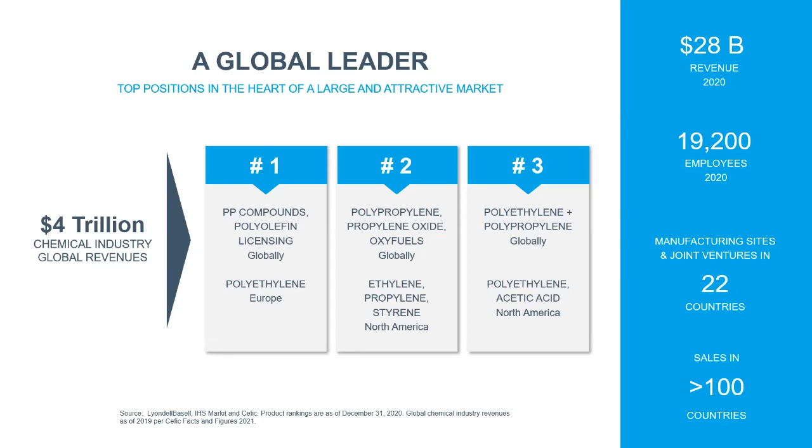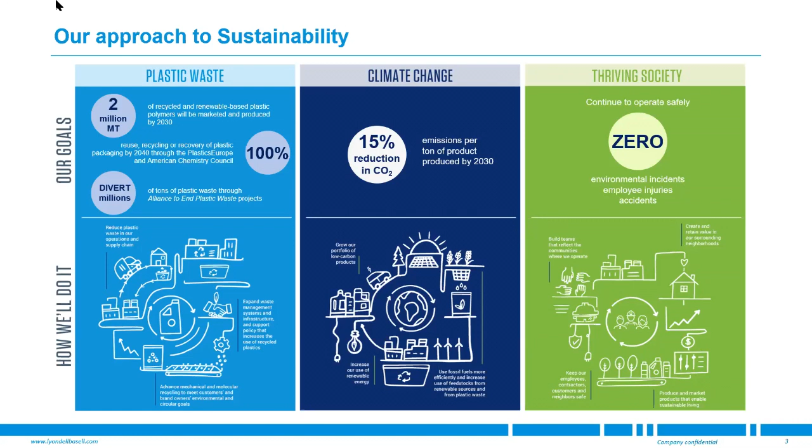And we also have a range of intermediate chemicals that we manufacture. We have refining capabilities in the US, and globally we manufacture polyethylene and polypropylene. In terms of our approach to sustainability as an organisation, I would welcome anyone to read our 2019 sustainability report. My understanding is probably in June, there'll be the 2020 version being released, but we've made commitments to globally produce 2 million tonnes of recycled and renewable-based plastic polymers. We have committed to 100% reuse, recycling, recovery of plastics in packaging by 2040. And we are a member of the Alliance to End Plastic Waste, so a founding member.

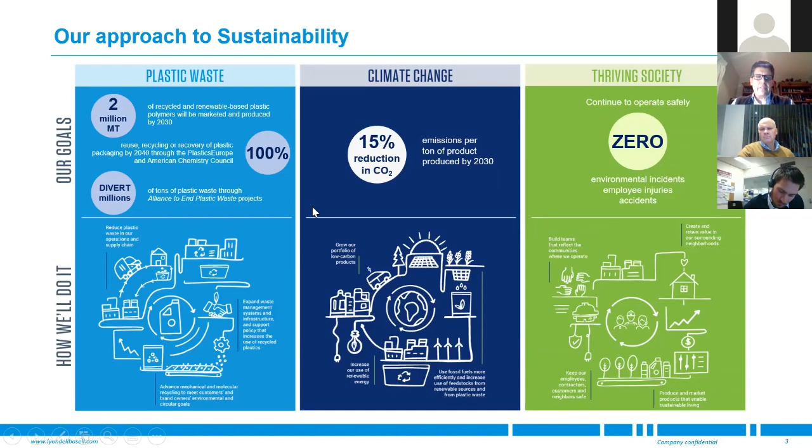We also have our CO2 emissions targets, 15% reduction by 2030. And we are very safety conscious, as most organisations are, but we have a program called Goal Zero, which is really aimed at safety and environmental incidences at a zero level. I just wanted to give a little bit of a feel for what we're doing globally, particularly in Europe at this stage. We've just recently announced a new brand trade name range. We typically produce grades that are either Hostalen or Moplen, or if they're stiff, they're called Adstif. If they're flexible, they're called AdFlex. So we're very imaginative in that area.

But what we've got now is a range of products called Circulen, and there are three fundamental Circulens. One is Circulen Recover, which relates to mechanically recycled plastic. Circulen Revive, which is about the advanced recycling of plastic waste, and that's something I want to cover in this presentation today. Both Circulen Recover and Circulen Revive concepts here in Australia. And a third one, which is Circulen Renew, which is to use renewable-based sources to produce polyethylene and polypropylene.

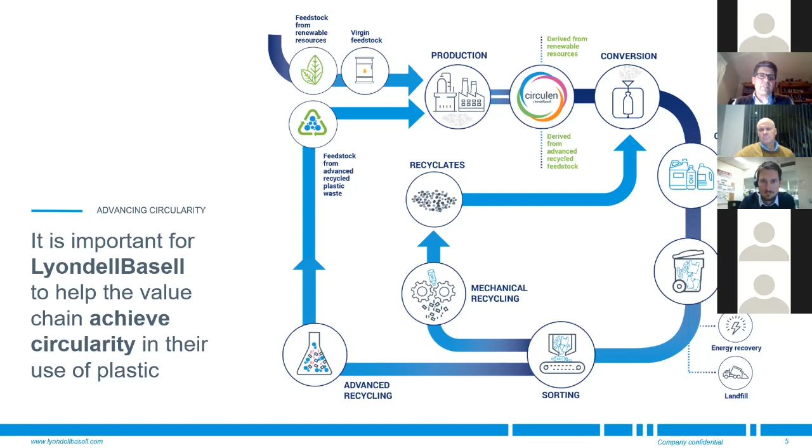I just wanted to say that we're avid supporters of APCO and the targets, and we also think that the new and expanding ARL, Australasian Recycling Label program, is going to really help with getting the right sort of feedstock into the right bin, into the right sort of areas. So we support the 2025 national packaging targets.

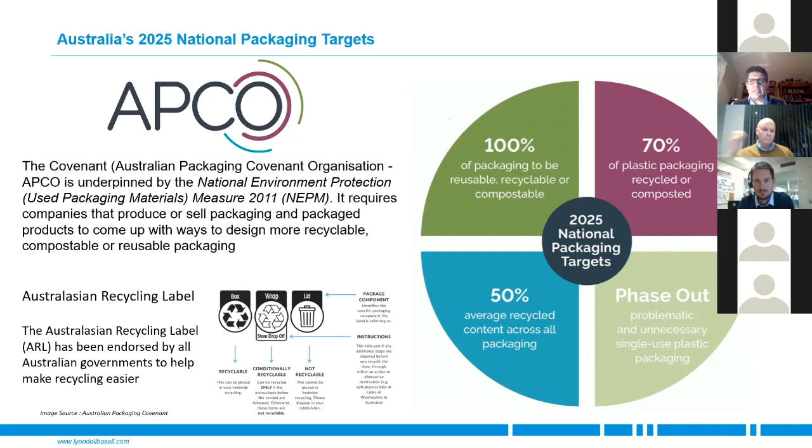We are an award winner. We won in 2020 the Sustainable Packaging Excellence Award. It was disappointing not to be able to get to the award; it was done remotely for us. We have really worked hard on our packaging solutions to our customers, and so we've won that award. We're pretty proud of it.

Just a brief overview of what we do within our product portfolio. Obviously, over decades, our customer base and in fact the plastics market here in Australia and globally has been looking to reduce, looking to down-gauge and use less material, and we've done that through two main fundamental areas of product development. We've made stiffer materials that still maintain their impact, and we've also produced lower viscosity materials that help those that injection mould produce parts at a faster rate, so you can get more out of your machine.

We supply into the durable applications area, so that's part of the reuse and repair section of the waste hierarchy, and we are progressively and increasingly playing more in the mechanical recycling and advanced recycling space. Advanced recycling is also known as chemical recycling or feedstock recycling.

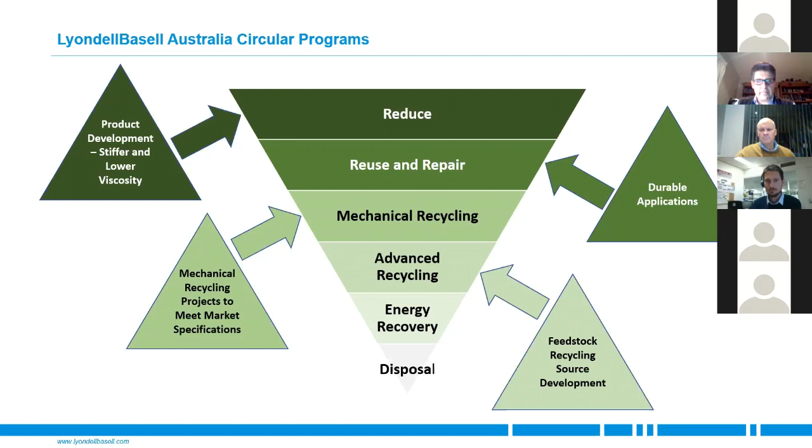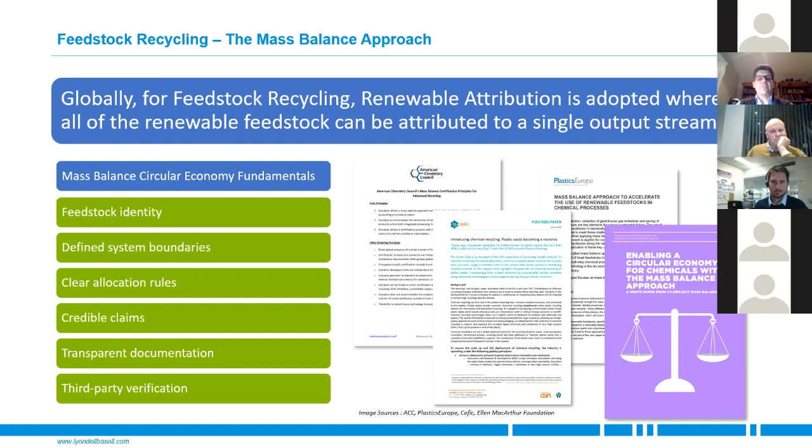I should just say that when we talk about chemical recycling, there's really only one kind of concept that is practical for the chemical industry, and that is this recycled or renewable attribution concept. This is based on the mass balance, where you are basically running a system which is using conventional sources of input. These are generally in our industry derived from fossilized sources, and they're non-renewable. But what you can do is add renewable resources into that stream, and you can just identify them through a mass balance process.

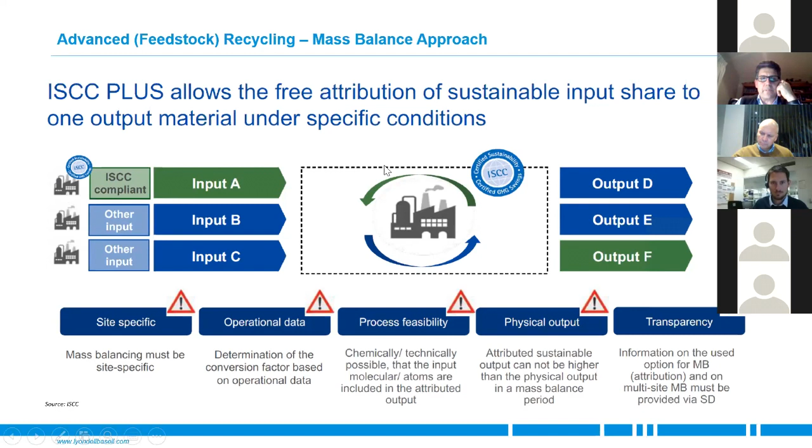The ISCC Plus, which is a certification system for renewables and chemicals, illustrates this really well. If you've got 3 inputs on the left-hand side, and you've got a renewable input, which is input A, you can take out 1, 2, or 3, or many products and attribute it to them, so long as you don't exceed the mass balance. I think that's a really good background when we are talking about the case study that I want to show you.

We're involved with a number of other companies in looking at a feasibility study in the Geelong-Altona petrochemical corridor. The other companies involved are Nestle, Coles, Licella, IQ Renew, and Amcor. I just want to briefly talk about the Licella technology. It's a plastic waste to oil conversion technology, so it is an advanced recycling technology. It uses near supercritical water. It is what is termed hydrothermal cracking, and the technology is termed CAT HTR by Licella.

Now, Licella are an Australian company, and we've been working with them for a couple of years, and we've just started this feasibility study earlier this year. We hope to complete it by around mid to end of June. Once we've completed that, we'll be looking at the opportunity and possibility of investing in this technology for the Australian petrochemical market. They do have a pilot line, and we'll come to what we've done with that pilot line as a demonstration. But a full-scale single line will take about 20,000 tonnes of plastic waste, and convert it to about 16,000 tonnes of synthetic oil derived from plastic per annum.

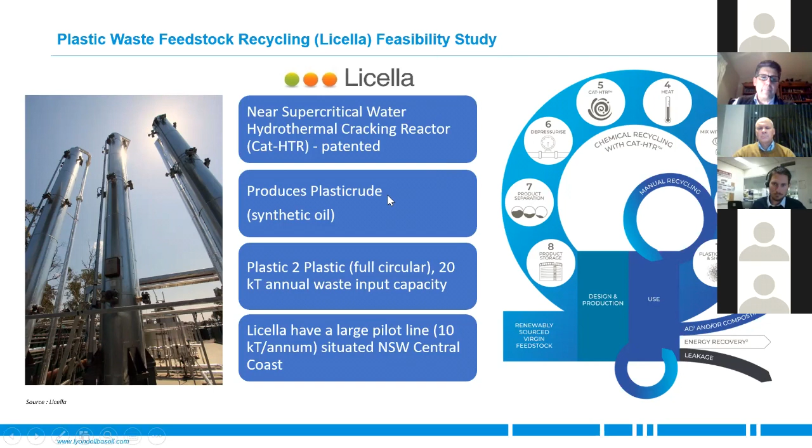These are the partners within the supply chain of this feasibility study. We've covered quite a broad area of that supply chain. Involved also is IQ Renew, which is a partner of Licella. As I mentioned, Coles, Nestle, and Amcor. All of these partners have industry funded this feasibility study. As I mentioned, it's looking in the Geelong-Altona petrochemical industrial corridor.

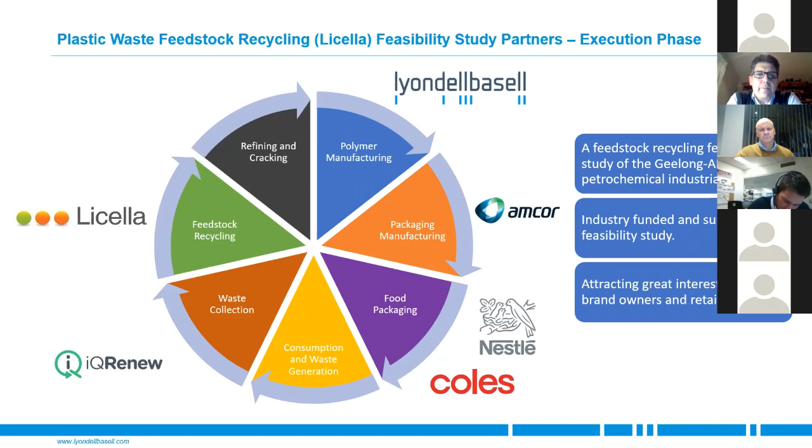LyondellBasell's objective here is to secure feedstock for advanced recycling at its Geelong site, which produces polypropylene. I just wanted to run through, you may have heard of this in the press. We've got a bit of press coverage on what we've internally called Project Kitkat.

And the name kind of gives away what was actually done. And so this was, I should say, a demonstration. None of the organisations are yet certified to either ISCC Plus or any other type of program. So the materials weren't put out there for sale, but it was really to demonstrate the process. And we actually went through what I'm about to show you, but it involved these 9 organisations all collaborating to eventually produce a Kitkat wrapper that had mass balance attributed 30% recycled content.

Now, as we would imagine and can kind of guess, these types of flexible packaging are not really that easy to either mechanically recycle or any other type of recycling program. So chemical recycling or advanced recycling really lends itself to this.

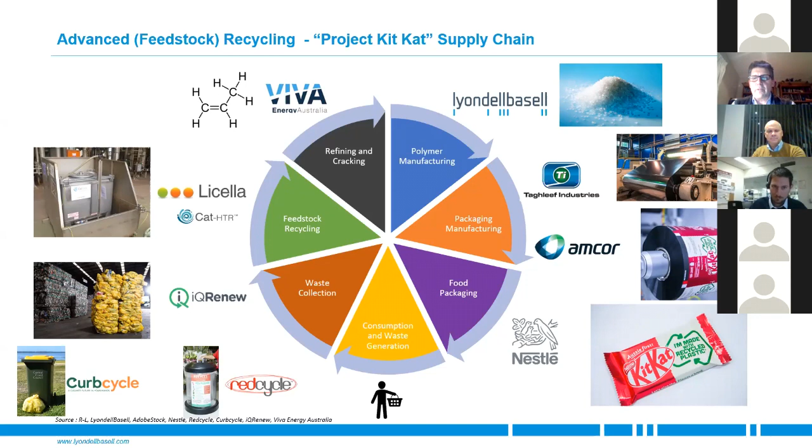So where did we start? Well, there were two collection programs. We're quite familiar, I think, with the Red Cycle program that's at Coles and Woolworths supermarkets, where we can take our soft scrunchable plastics, flexible plastics to the bins on a periodic basis, which is basically every time you probably go to the supermarket.

And there was a trial that was being run and supported by Nestle and IQ Renew, which was the Curbcycle program, whereby residents were asked and volunteered, and there's been a really good response, to put soft plastics into a dedicated sealable plastic bag, and this would be put into your typical recycling bin or the yellow bin, and then it would be collected at the waste manager. In this case, it's IQ Renew.

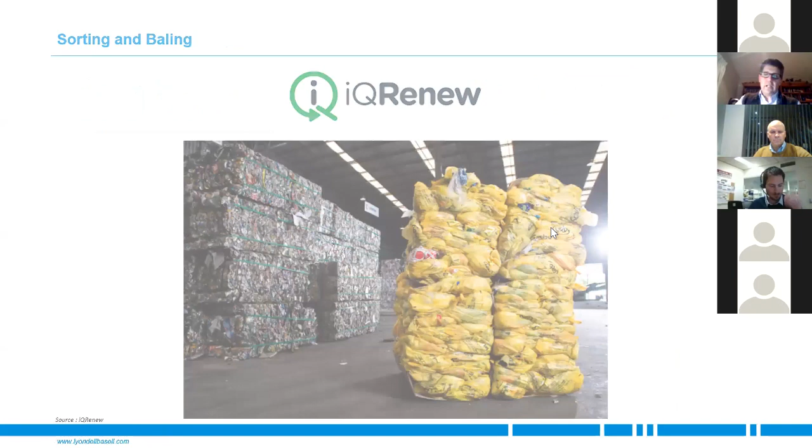So they would sort out all these soft plastics, and you can see in the background other types of plastics, more rigid plastics that are baled. But this is a collection of the trial material. So we took that material and sent it to Licella, who then in turn shredded the material and then processed it through their reactor systems. And you can see those reactors on the left. There's three large columns, and from the high temperature, high pressure water environment, we're able to produce oil.

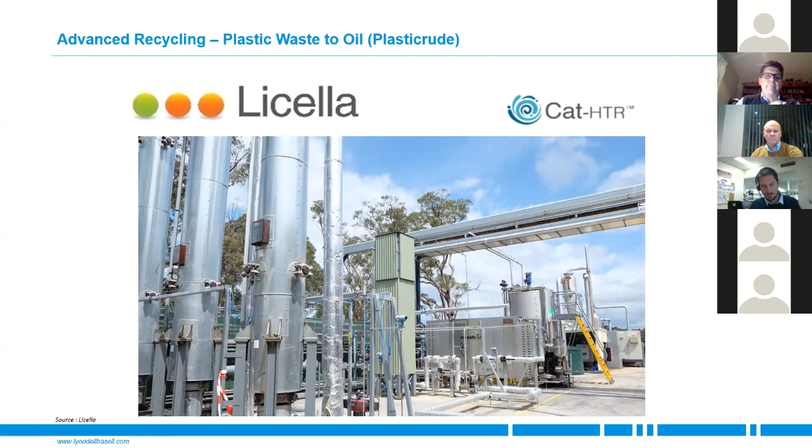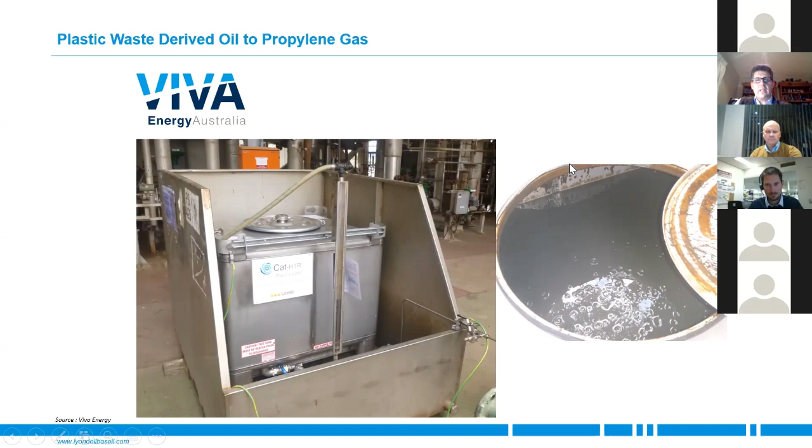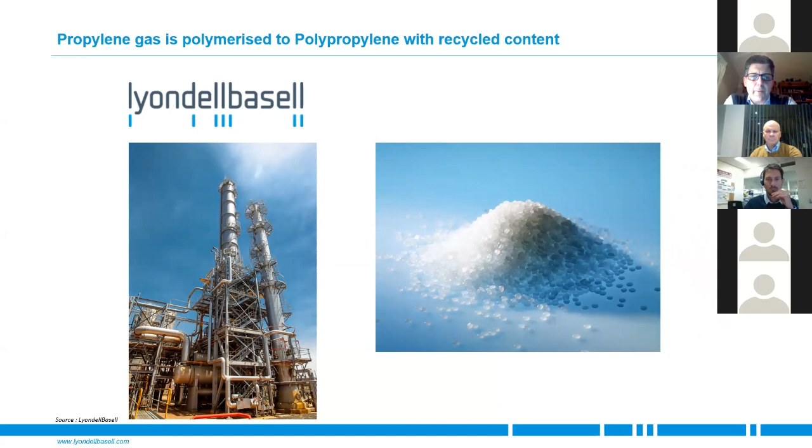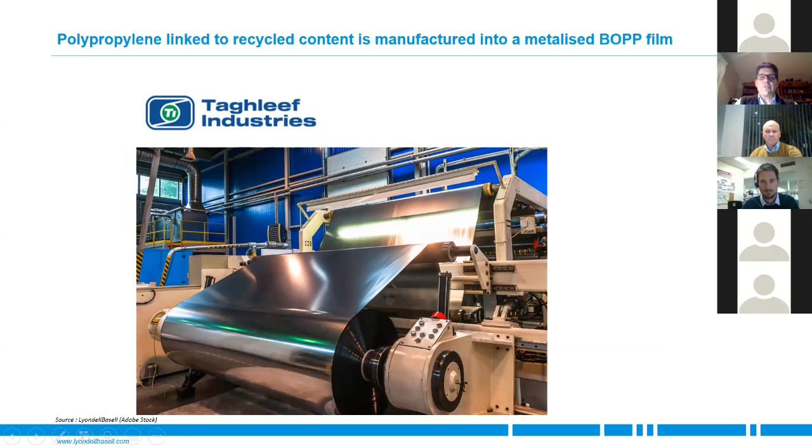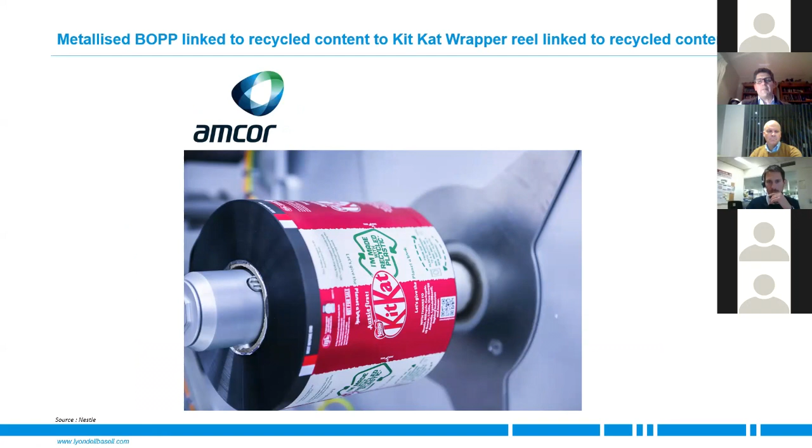That polypropylene was then taken to Taghleef Industries. Once again, this is all through a mass balance process. Taghleef Industries produced metallizable film, which would be spec'd for an eventual Kitkat wrapper. That film was then further processed by Amcor, which went through the process of putting on the printing, the cold seal, and other type features within the reel. And then that was taken to Nestle, and they went through the process of packaging the Kitkats.

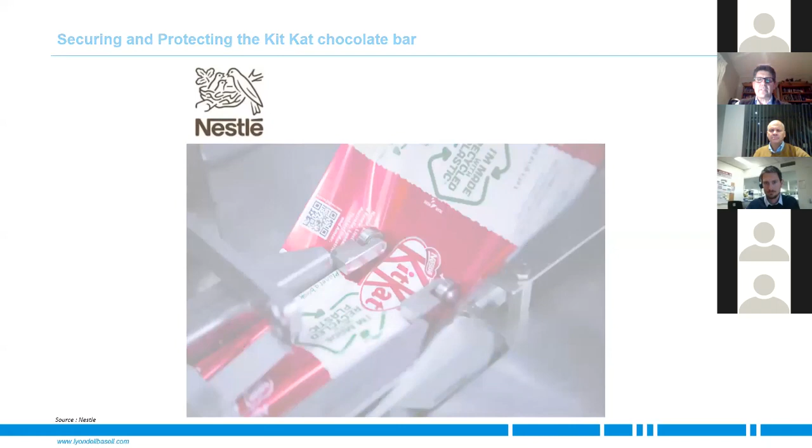And so on the label, you'll see here, it didn't hit the general market. We really have just used it for publicity in the industry, and obviously highlighting to federal and state governments what we've done here. We've got a very good response. I will say that I heard a story that Nestle had received some interesting Facebook responses, and there were some people that were very concerned that the chocolate was made from recycled plastic. So I can assure everyone that it's the wrapper.

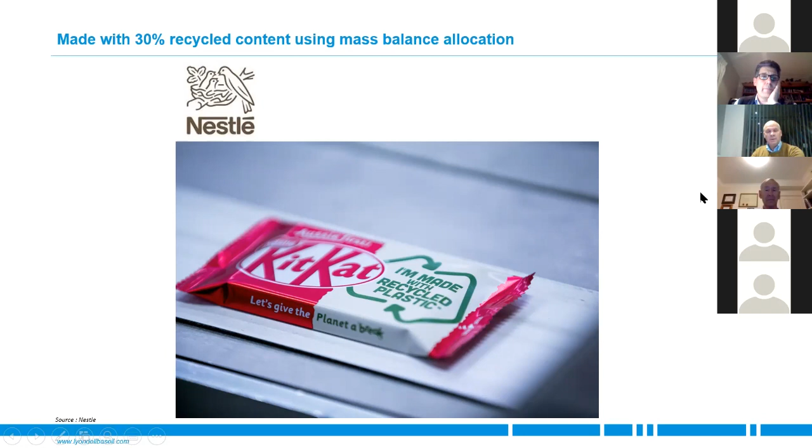This really does highlight, and I think we've learned a lesson, that the labelling of what you've done is really important, and the ISCC Plus has very specific labelling. And so the labelling that would, upon certification, go onto such a product would indicate that the material was made from recycled content that was sourced from a mass balance process. That's pretty critical because it's not a segregated process. We haven't stopped the refinery and then put the right feedstock in and then started it up again and run it as a segregated process. This is utilising existing technology, and I think they do this because at some point in time, maybe all the feedstock would be from recycled content. That would be the ultimate.

So this is another picture. We had a launch, which was called the Wrap on Soft Plastic, put on by Nestle, which invited many competitors and industry players to participate in the launch of this event. So it's quite good.

I want to move on a little bit. I've spoken about advanced recycling or chemical recycling, but wanted to just talk about what we might be doing or are doing in the mechanical recycling area. So we do have a project that we're working on at the moment. It's called Waste Saving Water. Basically what we're looking at is these polypropylene takeaway containers. This is a big part of our market, and we're looking at how we can create a recycling stream for these types of products.

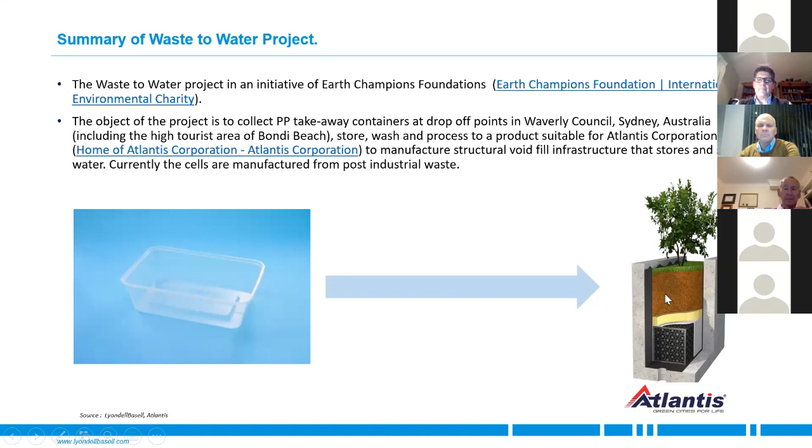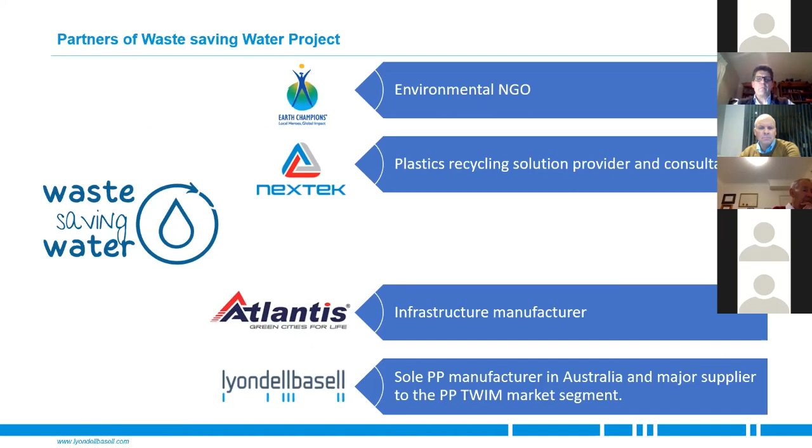The project is supported by Earth Champions, which is an international environmental charity. It involves obtaining these takeaway containers and converting them to water-saving infrastructure within urban environments. So these are the companies that are involved. We've got Nextek, Atlantis, which is the manufacturer of the infrastructure, and we're involved as well. So we're supporting this project, and ultimately we've got kind of grand plans.

First of all, we want to see this linear recycling stream occur, in which we would set up a collection, a cleaning and a recycling, and then a second life manufacturing program. But also we need to take off a feed and start to experiment with cleaning it up even further to a food contact state, and then potentially putting it in at our plant in Geelong at potentially a 30 to 40% level.

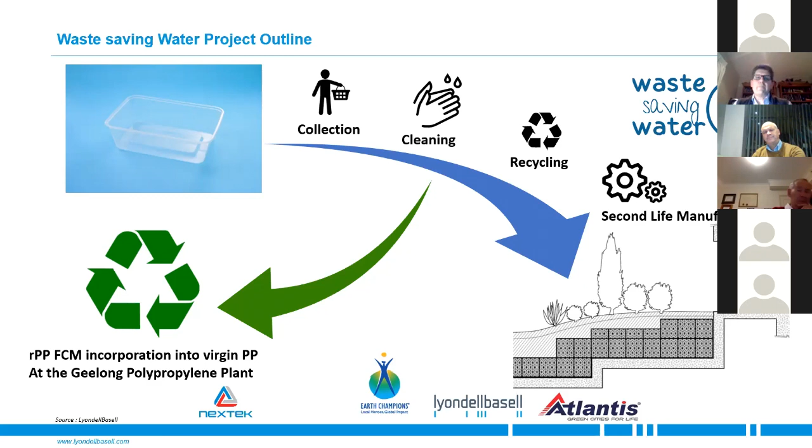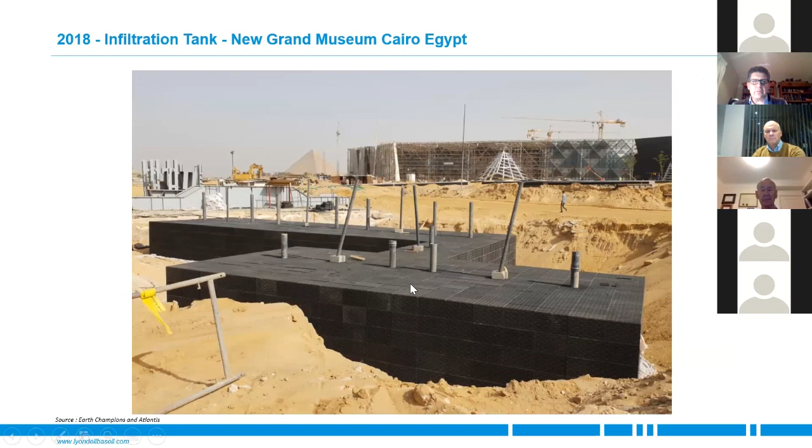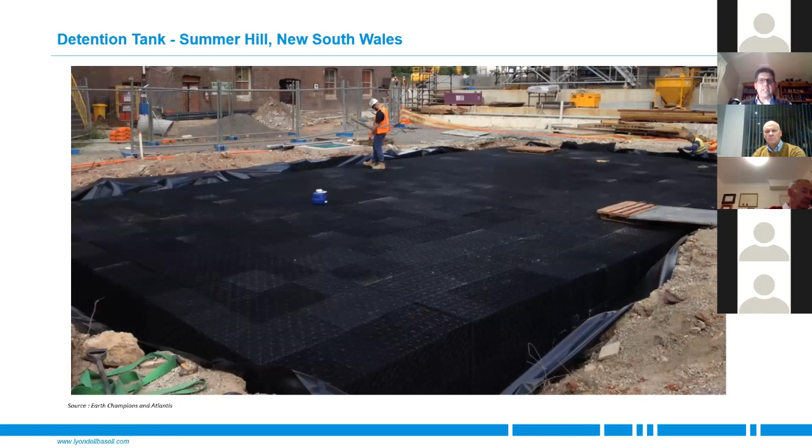These are some of the infrastructures that exist. You've noticed this has got one of the pyramids of Egypt in the background, so it's clearly in Egypt. But this is what that water-saving infrastructure looks like as it's being built. Here's something in New South Wales, another type of system that's occurring here. So what we are planning on doing is setting up a demonstration of the collection and then creating a particular infrastructure project. So I think that's coming along there.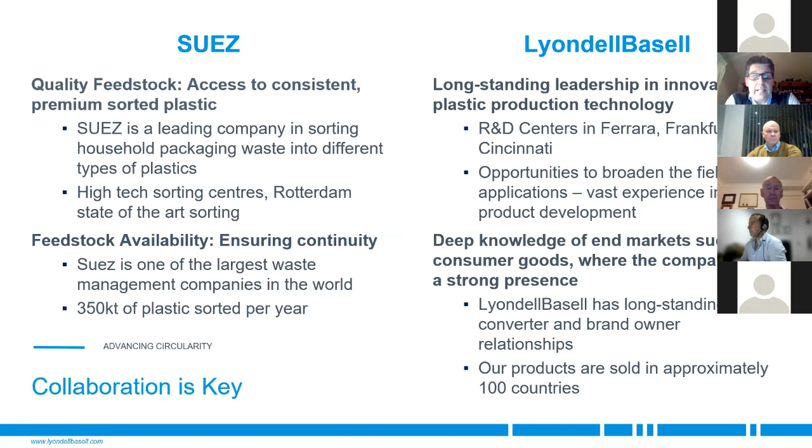I should say that we are really looking at a number of programs in Australia where we're exploring collaboration with waste managers. I can't really say anything at this stage as to what areas we're working in, because we're still in that development stage. But I can point to what we have done in Europe. We have a joint venture with Suez, which is Quality Circular Polymers, and we have two organisations dealing in two areas. One is the waste area and one is the polymer manufacturing area, and we've collaborated, and we think collaboration clearly is key to success.

It's a 50-50 joint venture, and I just wanted to show you a typical grade range. You can see that the materials are grey or ivory. They're all based on ethylene and polypropylene post-consumer waste.

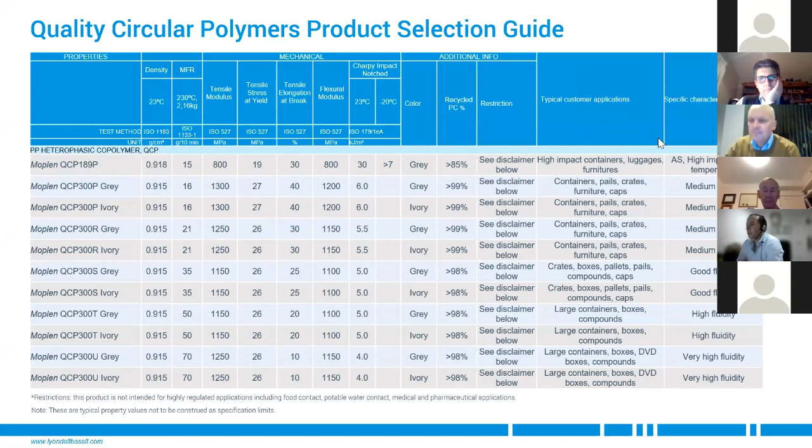Lots of exciting new developments happening, and it's certainly good to hear that you're looking at the Licella technology very closely, and also that you're considering recycled polypropylene for food contact applications. That's certainly a bit of a pain point where I'm based at PACT. A lot of customers are asking us what's happening with recycled polypropylene. Can we get a food grade resin? So before we move on, can you comment on that aspect, how's that going to be done with LyondellBasell? Is that going to be a mechanical recycling process, or are you going to do advanced recycling for RPP?

I think we firmly believe that both advanced and mechanical need to be looked at hand in hand. They're complementary. If you consider the waste hierarchy, as you move down, you should avoid, you should reuse. But then in terms of recycle, mechanical recycling fits above advanced recycling. So if you can mechanically recycle something, you should. And for those materials you can't mechanically recycle, then you should go towards an advanced recycling route.

If you were looking at a MRF or a PRF, these could be perhaps the REDcycle content of their collection. It could be tailings and offcuts and waste, really small materials, the broken caps and all that sort of stuff that could go into a chemical recycling process. And if we can get really good source separation and cleaning, then ultimately a mechanical recycling route. I think food contact is going to be a big challenge for mechanical recycling.

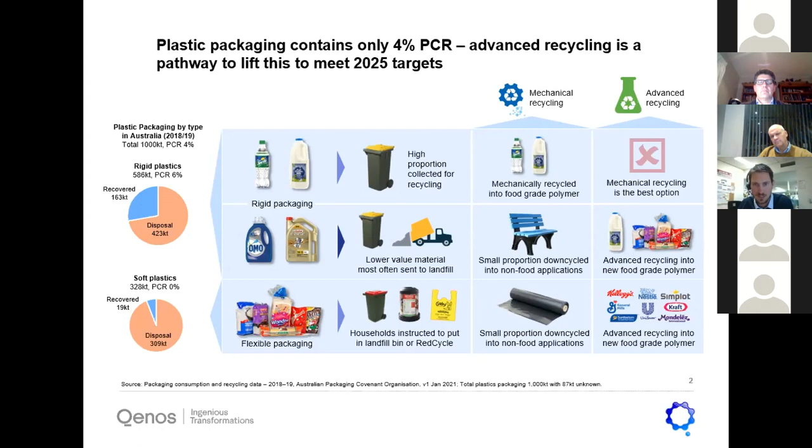Okay, so advanced recycling. So we believe this complements mechanical recycling, basically by upgrading heavily contaminated waste plastics to virgin-like quality. So let's first step back and look at the traditional way we make polymers, specifically polyethylene and polypropylene. So we start typically with a fossil feedstock. Now this might be a naphtha derived from crude oil, or it could be ethane gas directly, which goes into a steam cracker, for example, where you're making the monomer, which is ethylene in the case of Qenos's operation, and we polymerize that to polyethylene.

This then gets converted at packaging converters or other plastic converters into products that are being used, and in the old traditional linear economy end up mostly in landfill. Luckily, we do have, of course, recycling already implemented and working: mechanical recycling. So I'll not dwell on that. This is quite well established, but as we know, it's not capable of dealing with all the different waste streams. And so in the schematic there is a rest fraction from the mechanical recycling that can be further treated, and this is basically where we see advanced recycling coming in.

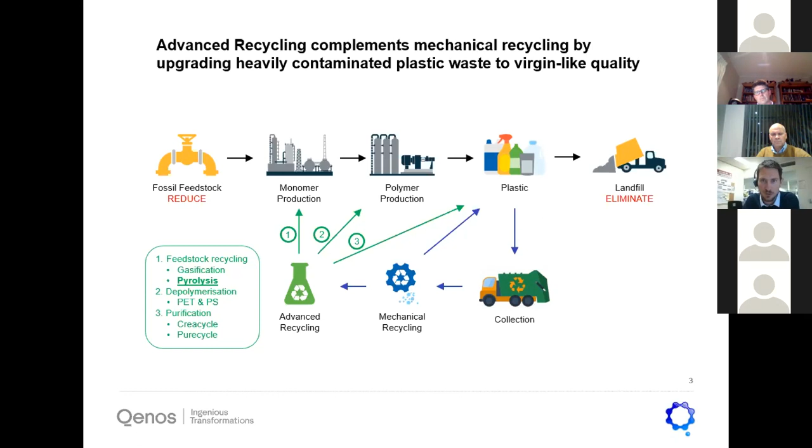So I think the widest applicability in our context is probably feedstock recycling in the form of pyrolysis. So let's look at that in a little bit more detail. Pyrolysis is able to treat mixed plastic waste to generate liquid and gaseous feedstock for polymers. So what kind of mixed plastic waste can it actually treat? It is ideally suited to polyolefins, which means a mixture of HDPE, LDPE, and polypropylene. It can deal with some other polymers like PET and polystyrene, but they need to be in low percentages.

They will basically not generate the desired feedstock for making new polymers again. The key one that one has to take out is PVC. PVC in this process would be generating hydrochloric acid, which could corrode the installations and also create all kinds of molecules that are not really suitable for further treatment, and should be really removed. You could argue it should maybe not have a place in packaging at all, but I'll leave that to the packaging designers.

So this mixed plastic waste feedstock is then fed to a pyrolysis unit. Now there are many different types of reactors being used. One example that Rob shared was about the Licella process, but there's dozens of different technology providers that have their own pyrolysis technique using catalysts or without using catalysts. Principally, it's operating at a high temperature between 400 and 650 degrees, importantly in the absence of oxygen.

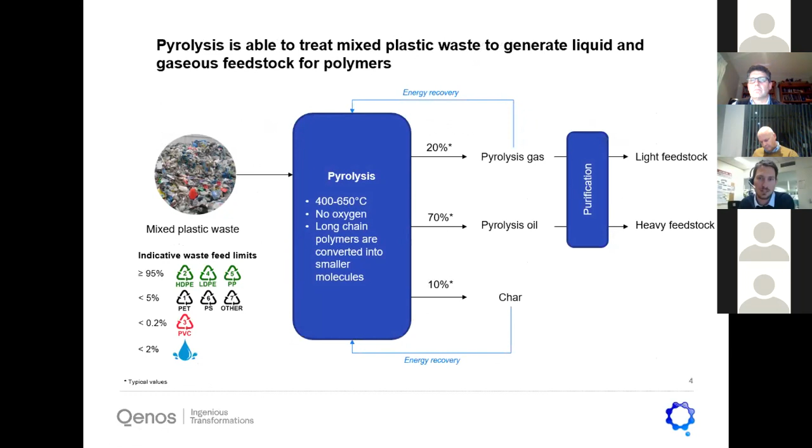So, sorry. This process has been known for 30, 40 years, and there has been a lot of academic research into pyrolysis, but it has been very difficult to commercialize. And it hasn't really been until the last 2-3 years that there's a real success rate in commercializing this for recycling. And I think the commitments that brand owners and governments have made have been a real catalyst in the commercialization of that.

And so on this page, I just want to show you a bit of the global rollout of pyrolysis-based feedstock recycling. And this is really accelerating. I think this list would have been very short had I talked to you 2 years ago. But we see at the moment, almost every week, a new producer announcing new capacity. We're seeing this capacity especially being built in North America, with a couple of projects announced, some coming on stream this year, others in 2 years. And the other region with a lot of activity is Europe, with basically all of the major producers announcing capacity for advanced recycling through pyrolysis type techniques.

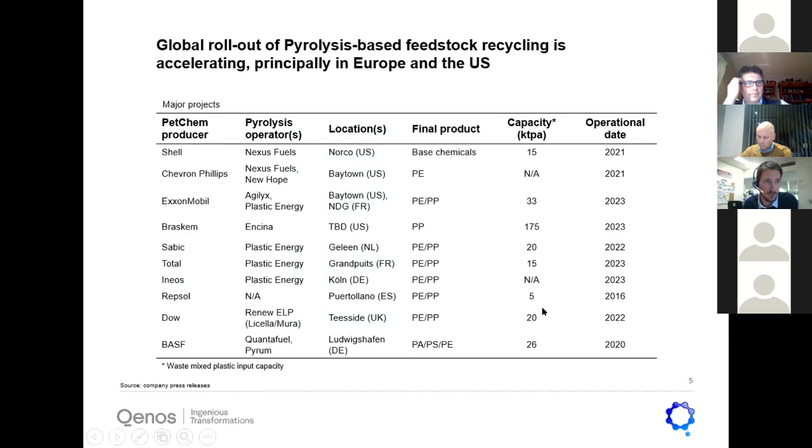I will not dwell on this further, but just to show you that yes, this is going from the lab into commercialization and to commercial scale, even though there's still a long way to go looking at those capacities and comparing that with the annual demands for commodity plastics.

So pyrolysis-based feedstock is optimally recycled back into virgin-like resin using existing refinery and petrochemical assets. As we discussed, virgin resin is converted into packaging and other products, is used, and comes back through waste management into MRF facilities. What can be mechanically recycled should be mechanically recycled, absolutely. But a part of it is ideal feedstock for a pyrolysis plant, which can generate a lighter feedstock that could be taken up by ethane LPG steam crackers, as Qenos operates in Altona and in Botany.

And the heavy feedstock could be a very good feedstock for the resid crackers or FCC units of a refinery, which then generate both LPGs and propylene directly that can be used by polyethylene or polypropylene plants. And the LPG can also be cracked in a steam cracker, generating ethylene and propylene. And this way you can then close the circle.

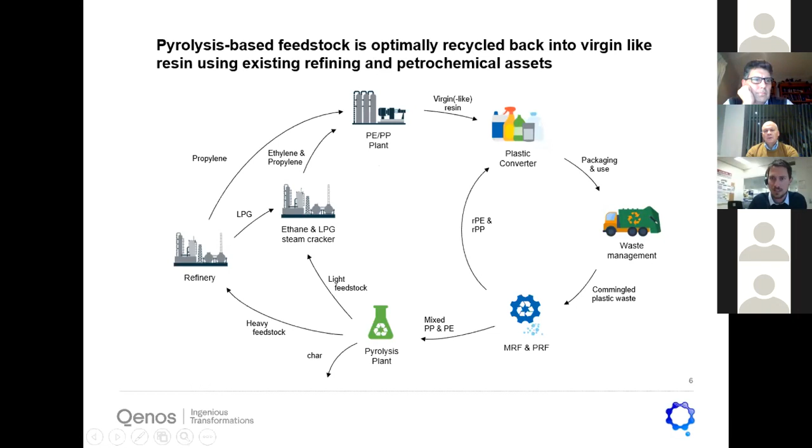And importantly, what you're making at this stage, that has come through the cycle, is absolutely indistinguishable from the original virgin resin. All the properties are completely preserved in terms of food contact and mechanical properties. There's absolutely no difference. So the challenge then becomes, how do we tell them apart? And I think Rob already touched on that. Mass balance is the key here to enable the allocation of recycled content by co-processing recycled feedstock in existing petrochemical plants.

It basically would not be economical to build new plants and everything just to process recycled materials. I think taking advantage of the infrastructure that is already there really enables this to be an economic process. And so you're using basically a mixed input material, fossil and recycled input, that is being used in a complex of refinery and petrochemical units, where it is then converted into products.

Now, in the process, all the molecules are perfectly scrambled and intermingled, and you won't be able to tell which molecule is in which product. But through mass balance accounting, you know what's going in, you know what's coming out. You can't get more recycled content out than you put in. Plus, you have to account for any losses along the way, so-called conversion factors. You can actually make that work.

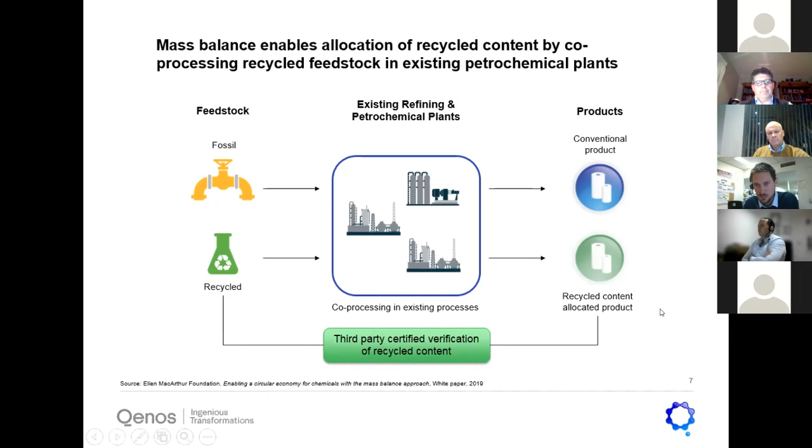And in order to make that transparent and build trust in that, third-party certification is really important here to make sure that the right thing is being done, and to create trust from brand owners and consumers. Now, are we helping the planet with that? There's of course a lot of challenge to that, and data. There's not a lot of data out yet, but there are some preliminary life cycle assessments that have been published. I'm taking here the example from Plastic Energy and Quantis, which uses the European context.

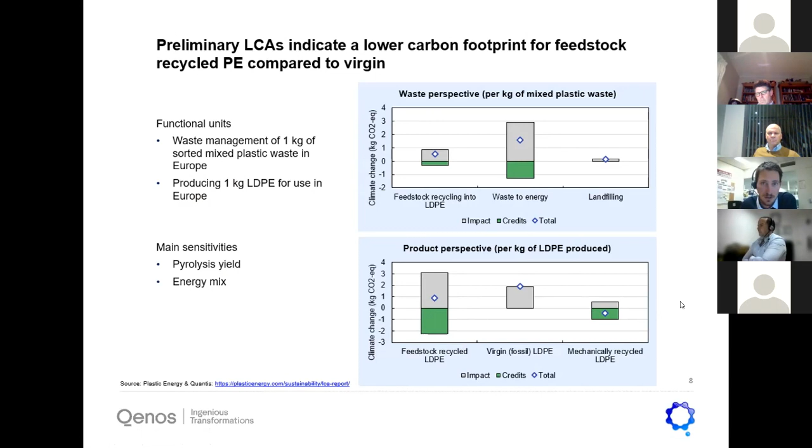So that brings me to the end and the perspective of where this can go. We think advanced recycling of plastics in Australia requires new infrastructure to be developed, but also, very importantly, existing assets to remain viable. There's a lot of work, and we're only playing a small part in this. Design for recycling will be essential. We need soft plastic collection, soft plastic sorting. Mechanical recycling capacity needs to be greatly increased. There's capacity needed for advanced recycling as well, and then also how to integrate that with existing assets. It's not as straightforward as it may seem.

And lastly, we have to make sure that the plants that we have in terms of refineries and polymer units, that we keep those assets operating here. And there was some positive news yesterday from the government for support for the refineries in Australia.

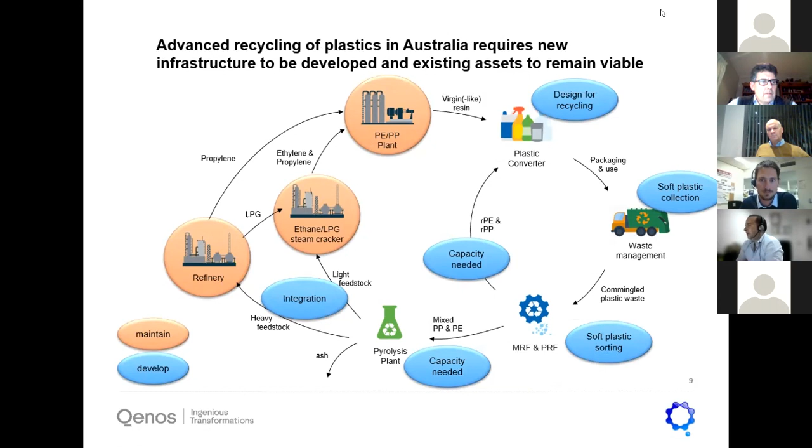Thanks very much. And that was excellent news yesterday, announced by the government that they're going to support the refineries in Australia. It provides surety and continuity, and that's what we need right now in the industry.

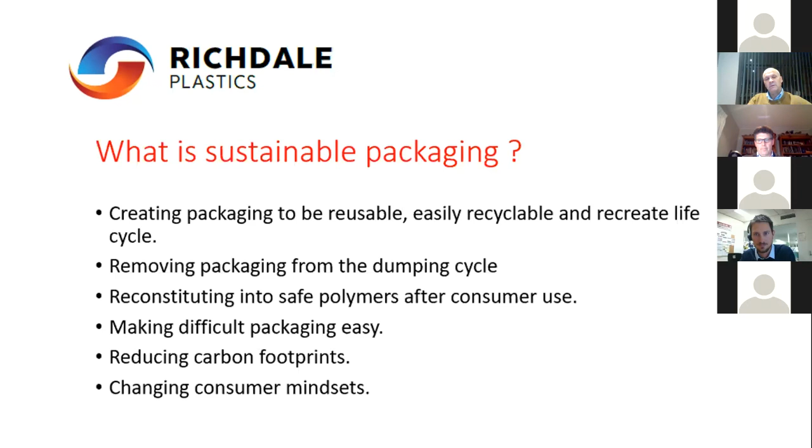It's not easy. Processing equipment has to change. There's got to be a rethink on how we do that, and how some of these flow wrappers, vertical form, fill and seal, and pouch filling machines work; they all have to be modified. So it's really important to understand that as well.

And so I think looking at other parts of the world and how they've actually created and designed their systems is a good place to start. And I think Australia is sort of going down that path. But there needs to be a lot of effort go into it, and this is going to be really important. So world's best practice recycling systems are going to be needed.

And it's like everything evolves, just like the automotive car has evolved over the years. The world's best practice recycling systems will evolve, and in 10 years' time, they'll look even more different than what they are today. So it's just a matter of putting the time and effort and the money into it.

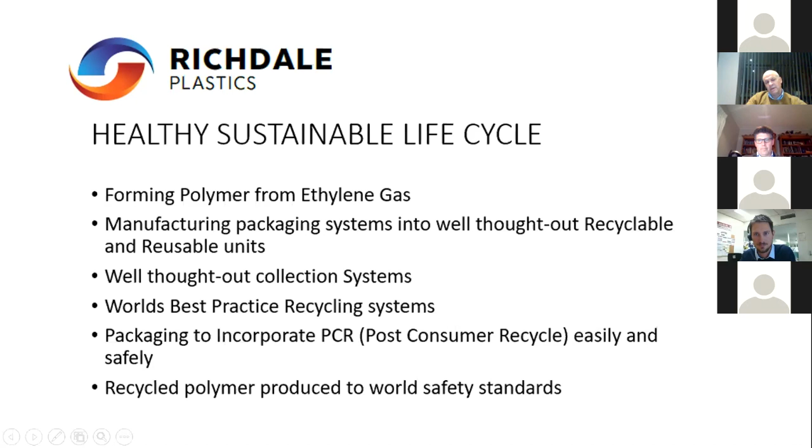Now, some of the packaging examples, if you look at packaging out there, this is just some of them, not all of them, but you've got the polyethylene systems, the polypropylene systems, PET systems, then you've got the new high barrier hybrids, which we're putting a lot of effort into, and you've got your PET PE laminate replacements, the coated BOPP, which is your PVC coatings.

So I think it was mentioned that there's a question mark around whether PVC should be in packaging. I sort of agree with that in a lot of ways, because it's a dangerous unit. When you have to recycle it, it produces some nasties, which most of us know, and so does PVC coated film. So classics are your coated BOPPs, your coated PETs, and your coated nylons. So they're the three prime ones, which in flexible packaging are still used heavily today.

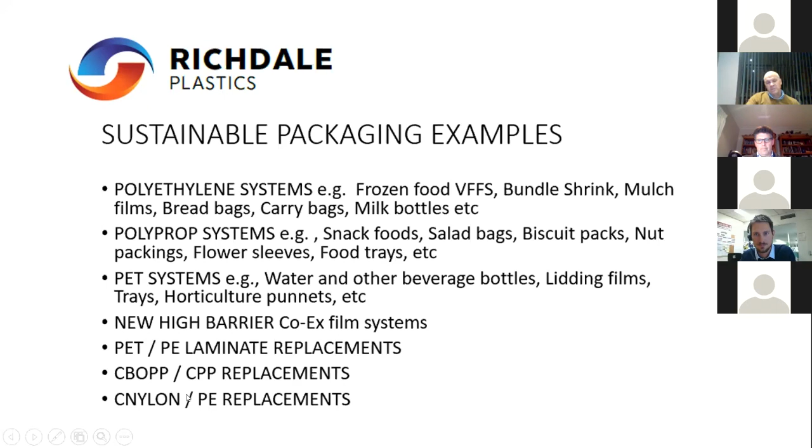So we've been very successful here at Richdale Plastics in actually replacing all of those three. We can actually replace every one of those structures with a fully recyclable product, whether you want it barrier or just non-barrier, and it's very cost effective, and in some cases it's actually even quite a lot cheaper. So it can be done, and these are some of the examples.

This one here, this is Sugar Australia. This is quite an interesting structure. It's a high barrier structure. It's a 7-layer; it can be run as a 9 as well. And that structure actually won the Innovation Award at the last FPLMA awards night. We took the coated BOPP or coated PET PE structure, and we turned it into a surface printed 7-layer coex, and this structure is recyclable.

So you can mechanically recycle this quite easily, and use it not in food grade, but you'll certainly get what we call a jazz coloured product out of it, with minimal contaminant. So it can be quite easily recycled and used. So that's low cost, low energy type recycling. So this is a real winner.

And this product here, these are doys, the recycled doys that we've created. Now we did this as a bit of a promo, but this is very smart technology, using a very similar structure to the CSR sugar structure. And that structure will basically replace virtually every doy structure that you see on the shelf. And it's very robust. It's hot fill. It can handle boiling water straight from the jug, and stand up firmly, won't fall over.

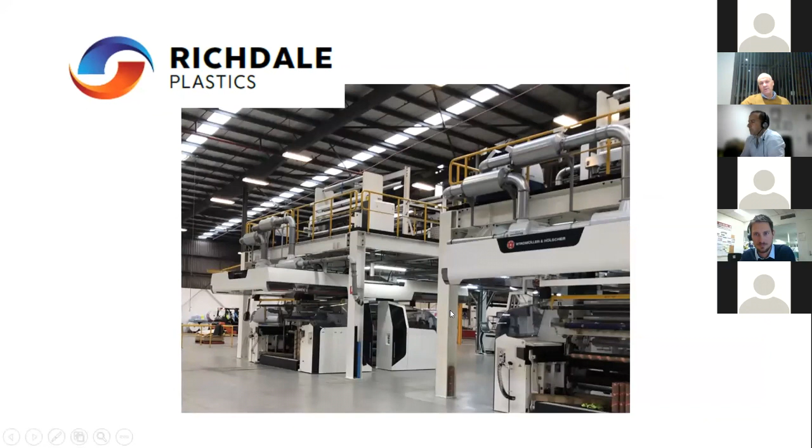This is a brand new 9-layer line, coex line, very high tech. So we've got a 7-layer line, 9-layer line. It's the best technology in Australasia. And then we've got our laminator, our press, and also a number of slitters. So we have a very good combination of equipment to be able to put together structures which are fully recyclable, using technologies from all those companies that have been mentioned tonight, through LyondellBasell and Qenos and many others out there as well, ExxonMobil, Dow, SABIC, BASF.

There's some really, really smart technology out there, and our job is to pull all those technologies together using equipment like this, and we can create some really smart solutions for companies.

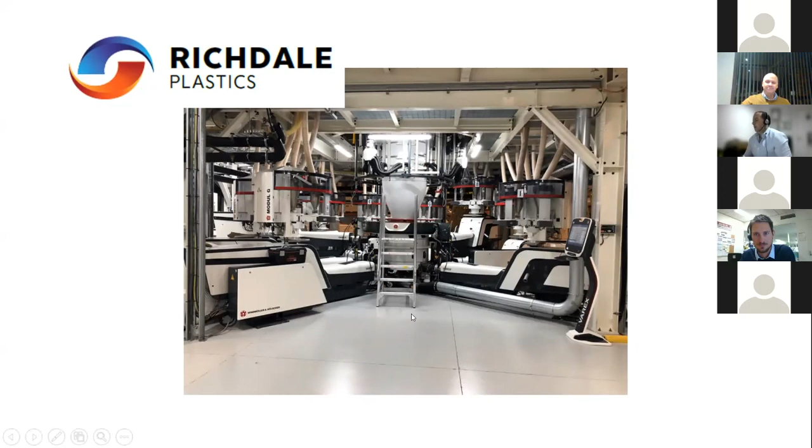Okay. Thank you, Daryl. Some interesting work happening in your area.

Yes. So if I could just start off, you mentioned international certification a few times. I wasn't clear what you meant by that. What were you certifying? Well, say you've got a structure. Now to certify that structure, so I can take that anywhere in the world, I can sell my structure up into Europe. So if I build a structure, I have it certified by, say, SGS, which is a certifying company. They do a lot of certifications for different standards.

They'll certify your company for HACCP or BRC or whatever, but they'll also certify your structure, so you can actually market that structure offshore or anywhere in the world as a recyclable structure. So we're all using the same methodology around what is recyclable and what isn't. So the Australian methodology is not Australian. It's more European. It comes from the European stable, and so that's where we're going.

And so when I say certification, we can put together a very complex structure, and we can say this structure here is fully recyclable. You can mechanically recycle it, and it will easily go into either a PP stream or a PE stream. They're the two main streams that we need to be aiming for. And so what we're doing is concentrating a lot on the PE stream, because that's where the dollars are.